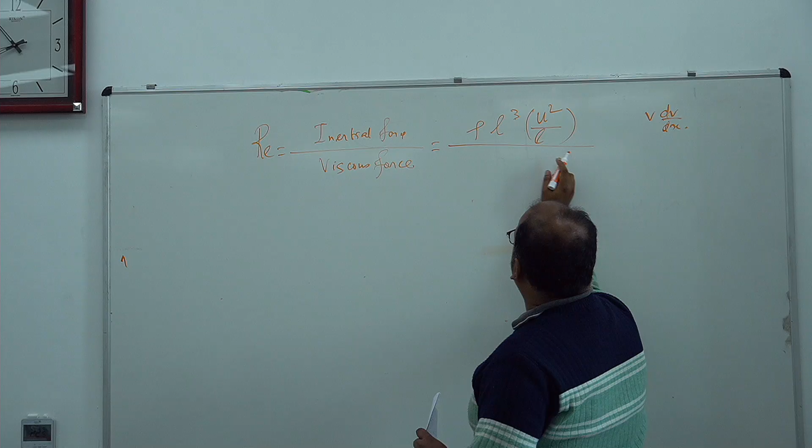Let's define the inertial force as rho L cube times the acceleration, the convective term. We can also write v dv/dx, but we can convert that to terms of L by u. So v dv/dx becomes u square by L. Or if we write v by t, we say u by t, which again eventually becomes u square by L.

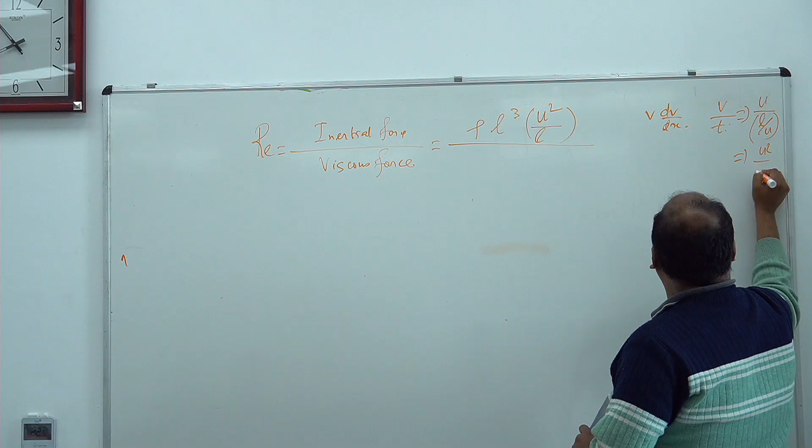Then for viscous force, take the viscosity, the area is L square, and del u del y we can take as u by L. So it becomes rho L square u square for inertial, and mu into u L for viscous. Eventually we achieve the final form we are usually accustomed to.

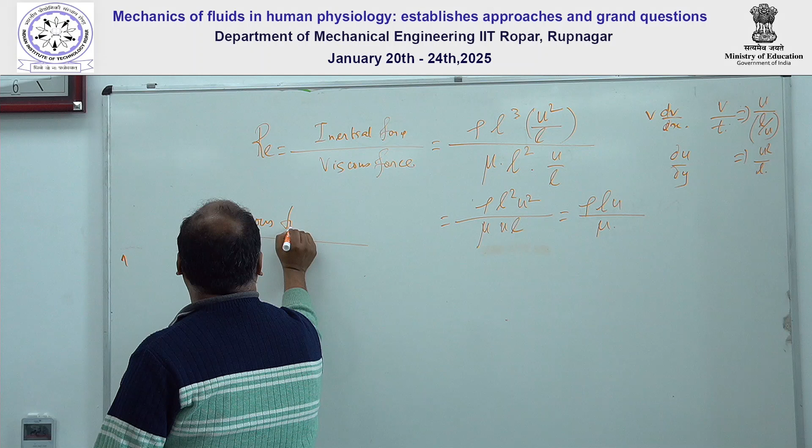This can also be interpreted as the viscous time scale by the inertial time scale. From this definition we can say that when Reynolds number is high, inertial force is much more dominant compared to the viscous force. In this definition, first let's define the viscous time scale as L square by nu.

You can see it is dimensionally consistent. This is meter square in the SI system, and nu is meter square per second, so L square by nu gives a unit of seconds. The inertial time scale, we can say simply as L by u. So we can rearrange it as u L by nu.

So we can say that when Reynolds number is very high, the viscous time scale is much higher compared to the inertial time scale. So this can be interpreted in terms of force, or it can be interpreted in terms of the two time scales.

Since I am also teaching convective heat transfer, there is a non-dimensional quantity called the Peclet number, which we generally say is the diffusive time scale by the inertial time scale. For thermal diffusion we write L square by alpha, where alpha is the thermal diffusivity, and inertial time scale is typically L by u. So this eventually becomes UL by alpha.

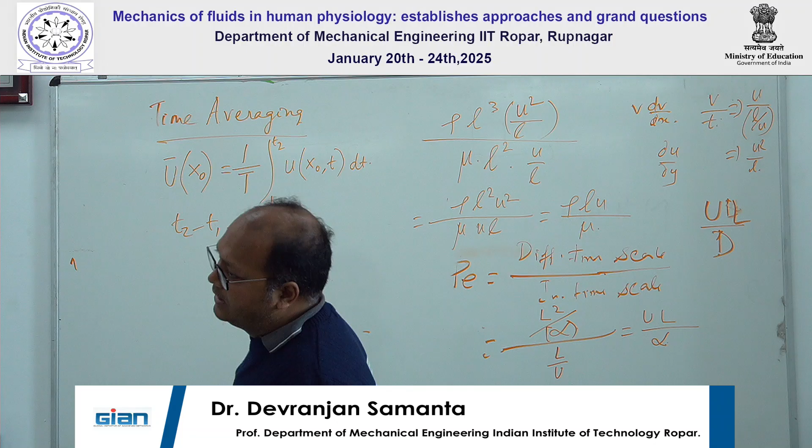In this context, just a funny story - in the IIT Ropar faculty interview, someone asked what I meant by the time averaging of this quantity. So I simply wrote from 0 to capital T, 1 by T, of U(x0,t) dt. One professor was not happy with the definition - he didn't like the idea of assigning the lower integration limit to 0. He said let's not keep it 0, rather write T1 and T2. So it's a matter of definition.

If we write from T1 to T2, just remember that the difference of the two times is the capital T. Otherwise we can start from 0, write capital T here, and then divide by capital T.

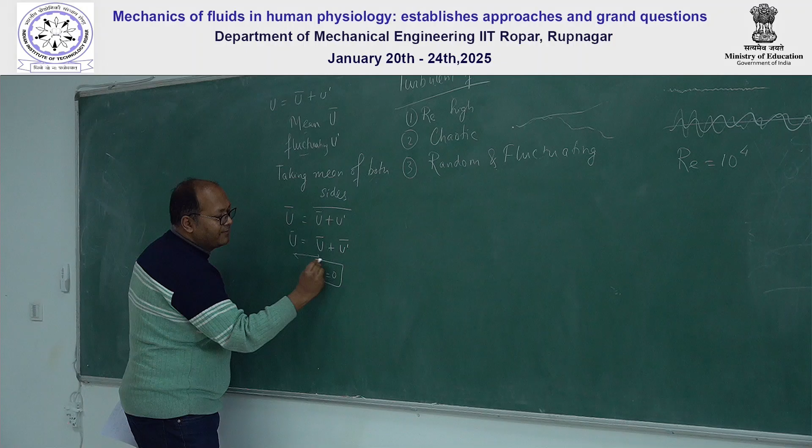So you can see that u equals u bar plus u dash. If we take the mean of both quantities on both sides - let's say this over-bar represents taking mean - so u bar plus u dash, we write like this. This quantity is already mean, so taking the mean of a constant quantity gives the same term, so u bar plus u dash bar. Now these two terms are equal to each other, so essentially, by definition, the mean of the fluctuating quantity is 0.

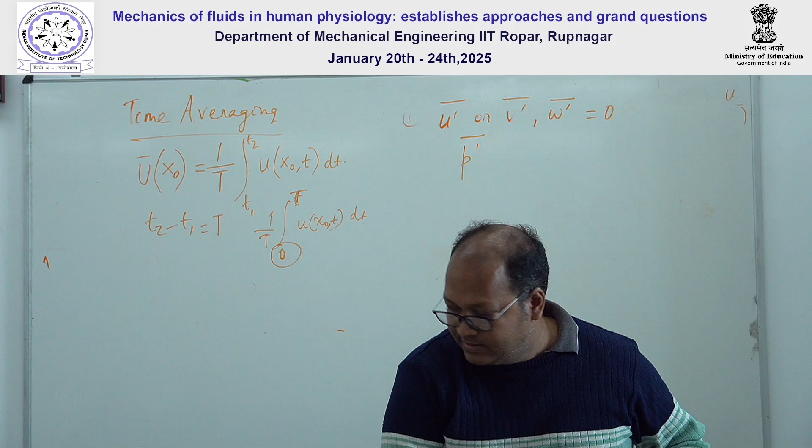This property will always be used while we derive the RANS equations. So let me write this part: any fluctuating quantity, let's say u dash, p dash, or w dash - for example the fluctuating pressure component - by definition, the mean of these fluctuating components is 0.

Then, just like time averaging, there are two other types of averaging, called space averaging and ensemble averaging, or some people pronounce it in the French way - ensemble or something like that.

Space averaging is basically, let's say, at a single time we are measuring over a 2D or 3D field at a single instant. At a given time instant t1, and the area or volume - for the sake of generality, we divide by the total volume - then over the whole field, we can write the three coordinates at a single time instant, integrated over dx dy dz.

So basically, for the sake of simplicity, let's take a 2D planar field. We measure at 10 different locations at a single time instant, then take the average of these 10 points, and say that this is the space average quantity. So that space average basically gives an idea of whether the velocity is homogeneous, or what is the degree of variation in the whole flow field. That's space average.

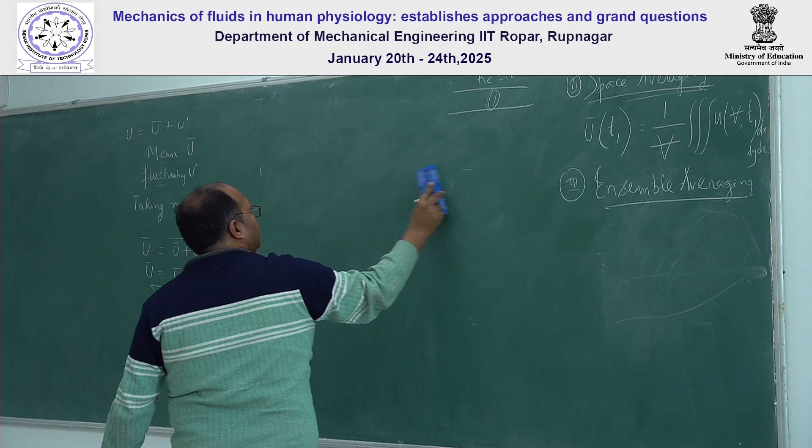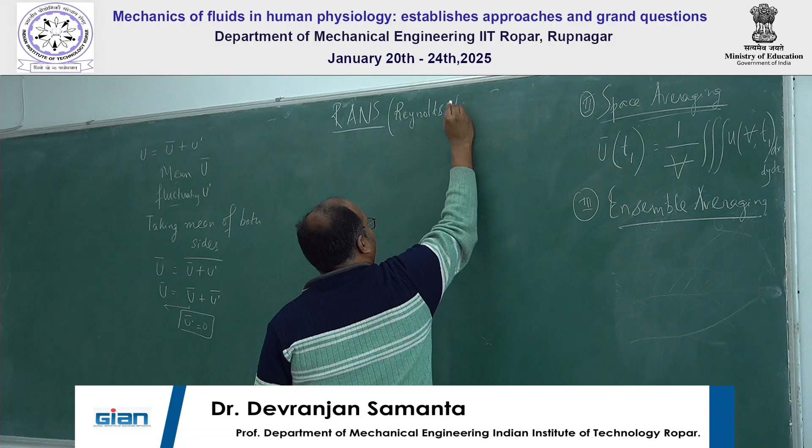RANS is Reynolds Averaged Navier-Stokes equation. I am just writing down the first two, since the Navier-Stokes part is obvious. So, Reynolds averaged.

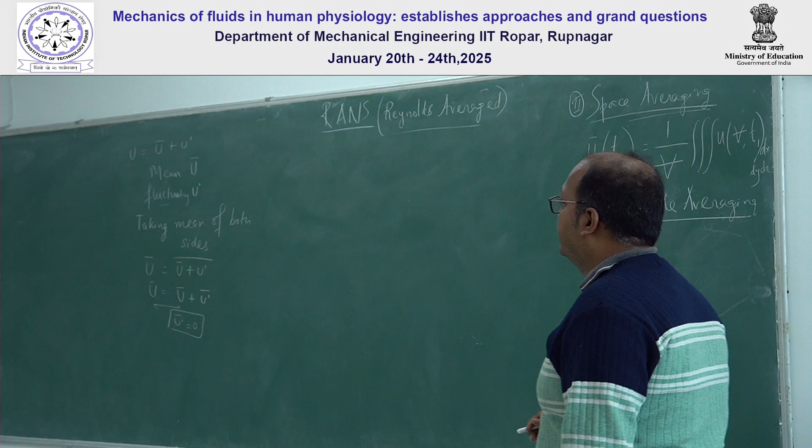So here's one thing: there is a term called stationary turbulence. By stationary turbulence, we mean, let's say we take this mean component - when it is stationary turbulence, the mean quantity is not changing over time.

So let's say some signal looks like this - if we plot U versus T and take the mean of this quantity, the mean is not changing. But let's say in some sort of pulsatory flow, the mean component is changing, and the velocity signal is fluctuating about this changing mean. So when calculating U versus T and plotting, if we plot the mean quantity, this curved line represents the mean component, and in this case the mean component is changing.

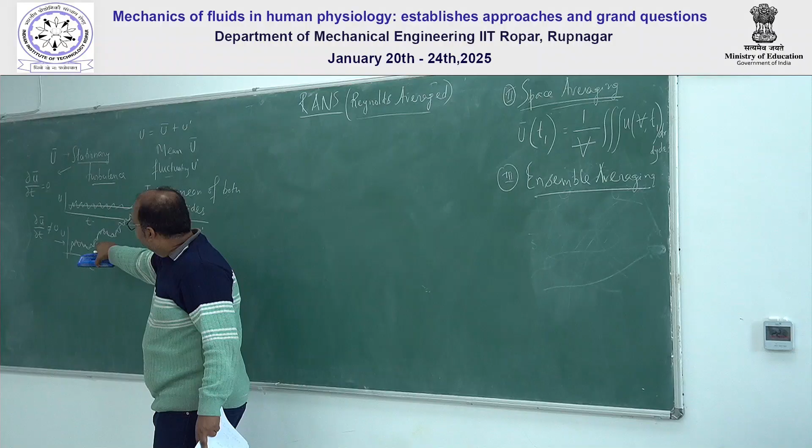So for stationary turbulence, when writing the time derivative term, if we assume stationary turbulence, we can take this as 0. But for a non-stationary case, since the mean quantity is changing, this is not equal to 0. So these are the two definitions which will be adopted: if we assume the turbulence is stationary, we can neglect that term. Otherwise, for non-stationary turbulence where the mean component is also fluctuating, we have to consider the time derivative term.

So we said initially that any quantity can be written as U bar plus U dash, and the same goes for other quantities. Let's start with the continuity equation - here again we are using incompressible flow, so for incompressible flow we can simply take the divergence of the velocity field equal to 0.

Following that, if we write it in index notation: del u_i, del x_i, or del u_j, del x_j equal to 0. Let's write it out first as del u, del x - we'll just use two components, but keep in mind that in general there are three - del u del x plus del v del y equal to 0.

Now let's assume turbulent flow. Essentially you can write this as del del x (u bar plus u dash) plus del del y (v bar plus v dash) equal to 0. If we carry out the averaging procedure here, the next step becomes del del x u bar plus del del y v bar equal to 0.

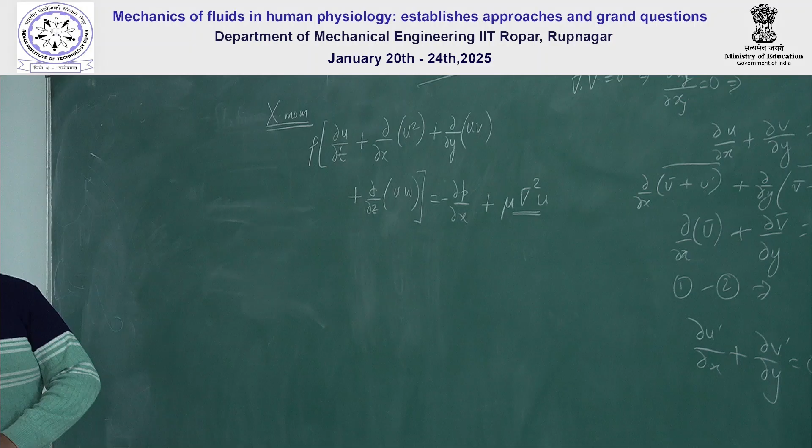Then we can write equal to minus del p del x, and we already know that mu of Laplacian square u, but we will write this term now in terms of the shear stress. So let's recalculate the stress tensor.

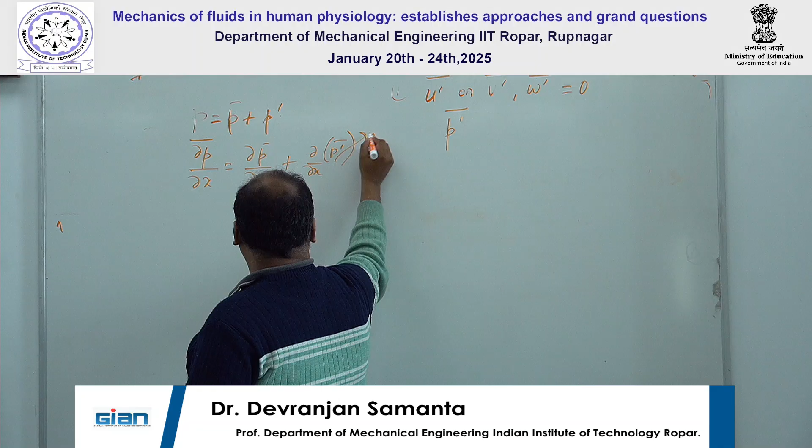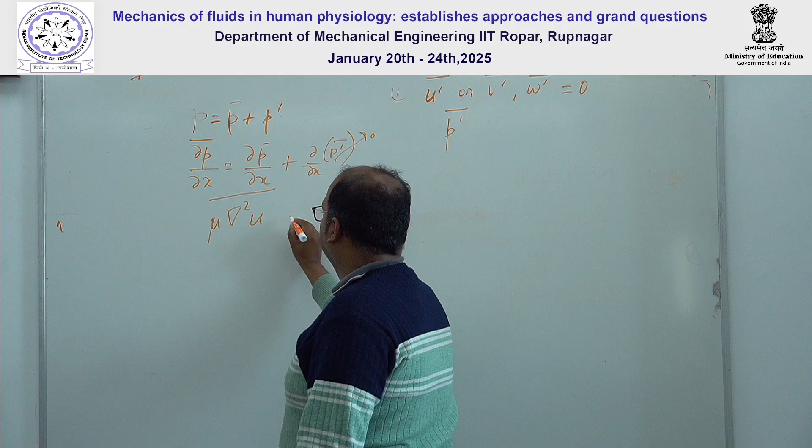Similarly, here the viscous terms mu grad square u, if we carry out the averaging procedure, this becomes mu grad square U bar only. The fluctuating component dies out.

So the stress components again, when we carry out the averaging procedure, we simply write tau xx bar. This means, let's say tau xx, if we write the general term, here p is already explicitly written.

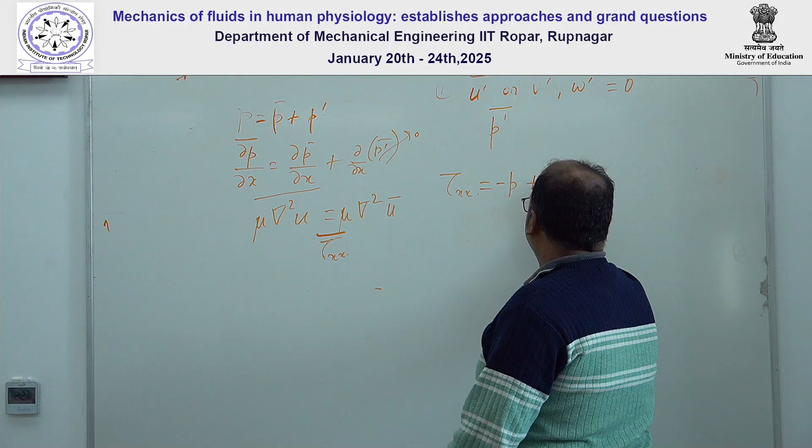So minus p plus let's say 2 mu del u del x. Okay, so for the time being, since we have already exclusively written the p term, if we carry out the averaging procedure, this becomes 2 mu del u bar del x.

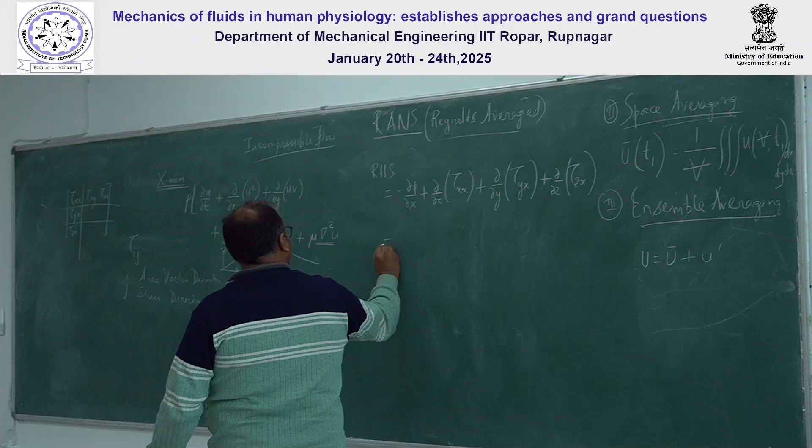Okay, so then when we are carrying out the right hand side term averaging, here we are writing equal to minus del p bar del x plus del x.

So this now just involves the derivative terms involving the mean velocity component, plus del y tau yx bar plus del z tau zx bar.

So just like if you recall here, you can write down the index term and you can also expand it. So let's say tau ij equal to minus p delta ij plus 2 mu Sij, which is the velocity gradient term. Please note I haven't written the lambda term because we are assuming it is incompressible. So Sij is half del ui del xj plus del uj del xi.

So when we are writing the tau xy term, the Kronecker delta will cancel out. So you can write 2 mu half of, let's say x is 1 and y is 2, del u by del y plus del v by del x. So this becomes mu del u del y plus del v del x.

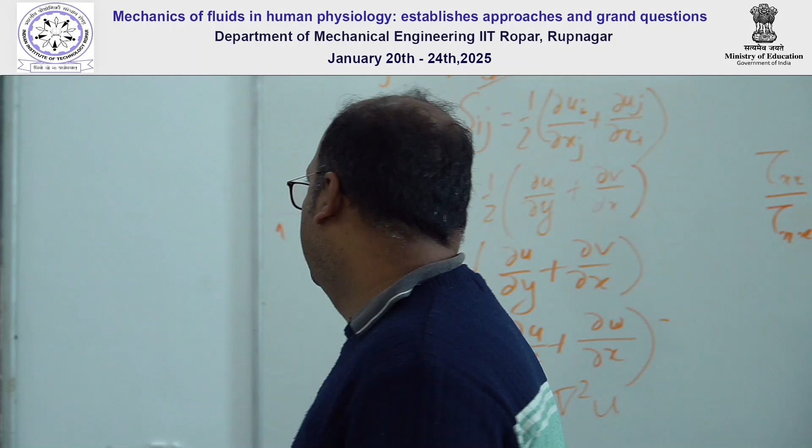Similarly, in the y direction momentum equation, we will land up with the Laplacian mu grad square v, and mu grad square w.

So let me just write down the y momentum equation. We know there will be mu grad square v and mu grad square w, but this essentially comes from these sort of derivatives. Let me just write it out.

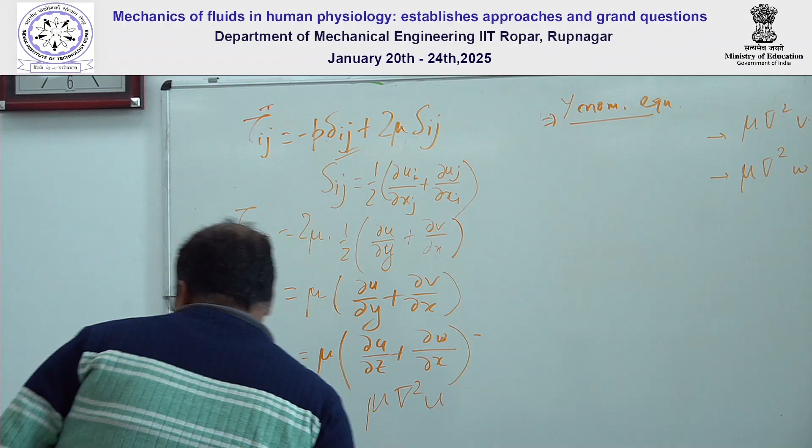First, here you can see tau xy, tau yy, and tau zy. So in the y direction it will be del del x tau xy plus del del y tau yy plus del del z tau zy.

So here also you can see that if you note the second index, all are y, but the first index, the area vectors are acting in different directions, that is x, y and z.

Similarly, in the z axis you can see the component, the second index will always be the same: tau xz, tau yz, and tau zz. So if we follow this pattern, we can write this varying along x, this varying along y, and this varying along z.

So again, the right hand side stress components for the z direction, the simplified term we have already written as mu Laplacian of w, but when we write it out it will be del del x of tau xz plus del del y of tau yz plus del del z of tau zz.

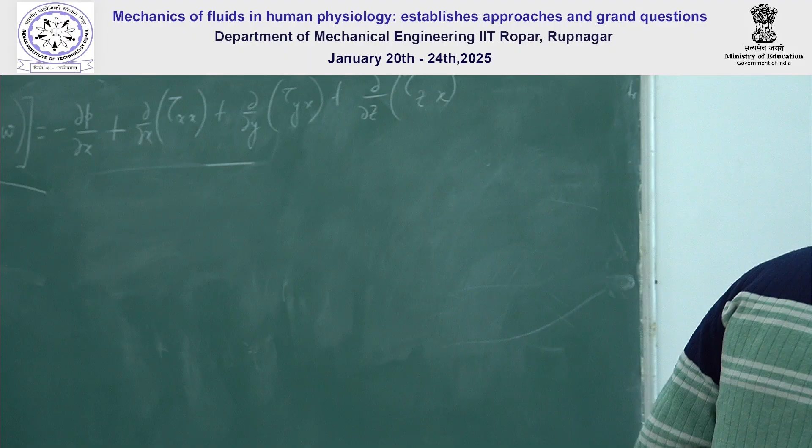So let's write down the left hand side average quantities here. So this term will give these two terms: one is the square of the mean component, and one is the mean of the squared fluctuating component.

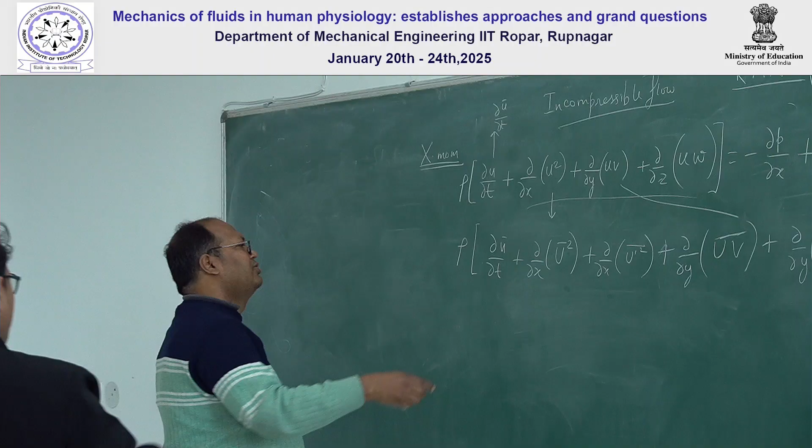So let's, for the sake of it, we make it stationary turbulence. Okay, let's remove it. So here, we are assuming stationary turbulence, that's why we are dropping the term, and then we are just left with the three terms, and these three terms, after averaging, are generating the six terms. So what we are seeing now is that normally these components are taken in this part, and they are said to be Reynolds stress terms. But actually, if you see the derivation, these terms are arising.

So essentially, how are these terms coming? This, when we are doing the momentum equation derivation, is basically the variation of the momentum flux in the different directions, right?

So you can imagine that this is the variation of the momentum flux due to the mean component, and this is the variation of the momentum flux due to the fluctuating component. Although normally, when we don't look at the derivation part, we straight away say that these components will come into this side, and we term those as Reynolds stress. But the physical significance is, please remember, it is not stress actually, it is arising due to the whole fluctuating component. Later we will club together in terms of the stress component.

So here, after this, let's write down, we are dropping the stationary term. On this side, if we write the derivative term, we can also drop it depending upon the choice. I will just keep it because later I want to show that it can be clubbed together. So let's say we are writing like this: del x u bar square plus del y u bar v bar plus del z u bar w bar.

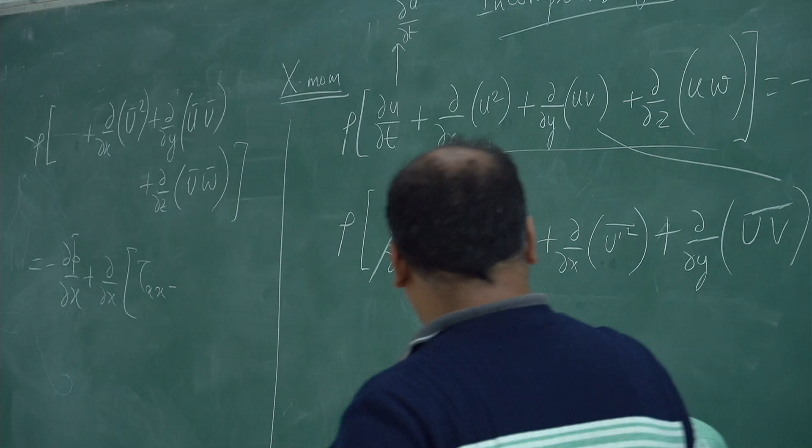Okay, so here you can see that these are the fluctuating components. This again, this is one, and this is one. So these will go on the other side.

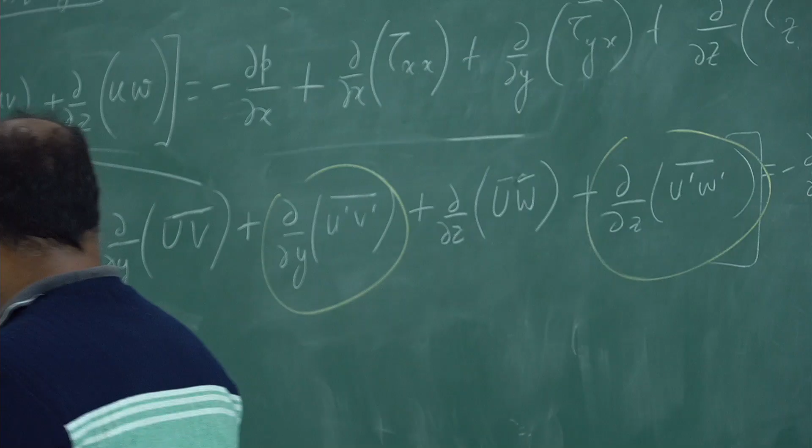Now we are writing like this: minus rho u dash square plus del y tau yx minus rho u dash v dash plus del z tau zx minus rho u dash w dash.

Okay, so now you can see after the averaging procedure, we are taking the fluctuating components to this side and we are clubbing it with this one. Please see, this is again over bar.

So the tau bar xx essentially means 2 mu del u bar del x. Tau yx means mu times del u bar del y plus del v bar del x. So even if I forget to write the overbar symbol, please assume that this is the averaged quantity.

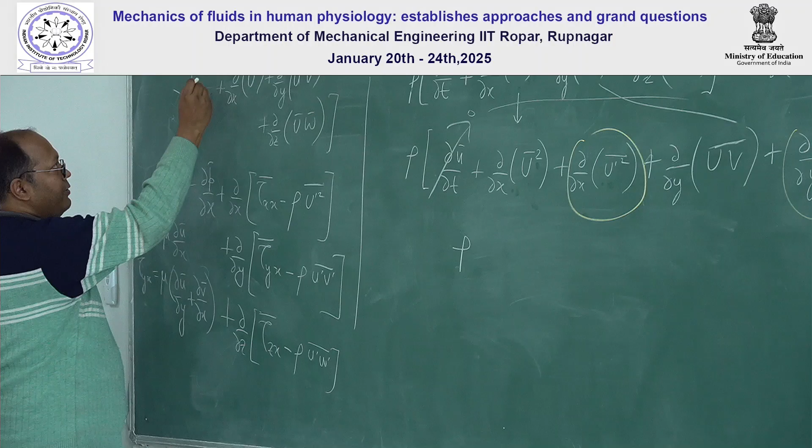Okay, so how much time? I guess I have still some 15 minutes. So now you can see that this one and eventually these four terms, let's just write T here.

So this can be further simplified as D u bar D t. The left hand side terms, if you carry out the averaging procedure and follow the information using the flow conditions, you can finally write the left hand side like this. The pressure components will always be minus del P bar del X, minus del P bar del Y, minus del P bar del Z.

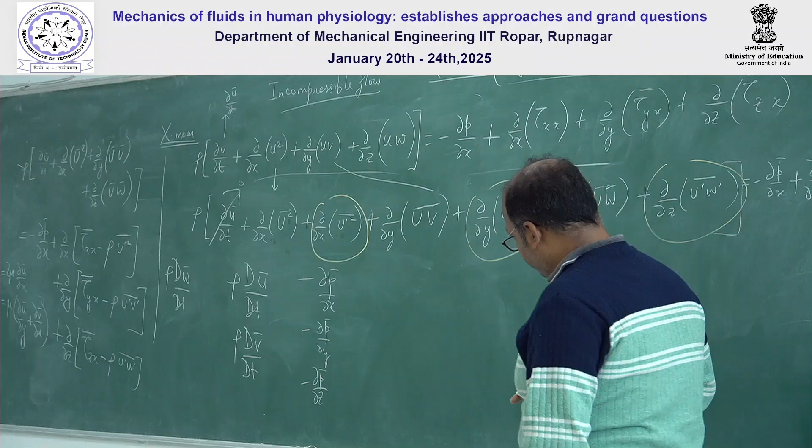If we consider the body force, we are saying that the body force is not fluctuating. So for the sake of convenience, we are just dropping those terms. Even if there is any body force term, that will not have any mean or fluctuating component. The gravitational force will always be as it is, or electromagnetic force will never fluctuate. And even if it fluctuates, like Coulomb force doing some electromagnetic interaction, that is not like this typical turbulent fluctuating quantity. So this one is essentially the left hand side, this is the pressure gradient term.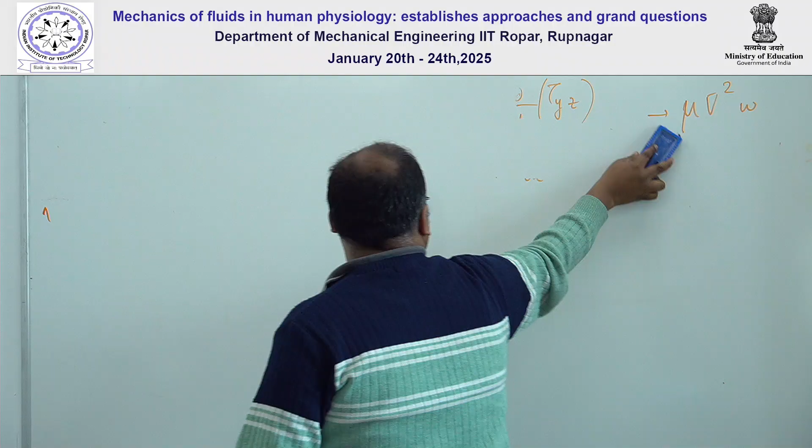If we now look at the stress components, let's just write down the stress component here. We just derived the left hand side, sorry, the x momentum equation.

The stress component will be tau xx minus rho u dash square plus del y tau yx bar minus rho u dash v dash plus del z tau zx minus rho u dash w dash. So now you can see here there is u dash square, u dash v dash and u dash w dash. If we club all the three directions together, let's first write this down. So this is the x momentum.

If we do the averaging procedure of the y momentum, we have earlier written down the stress components. So here again, just remember that the y direction components are tau xy, tau yy and tau zy. It is varying along x, it is varying along y and it is varying along z. So when we carry out the averaging procedure here, we are writing del x tau xy minus here now it will be... or let me just write down the Reynolds stress in matrix form first, that will be easier.

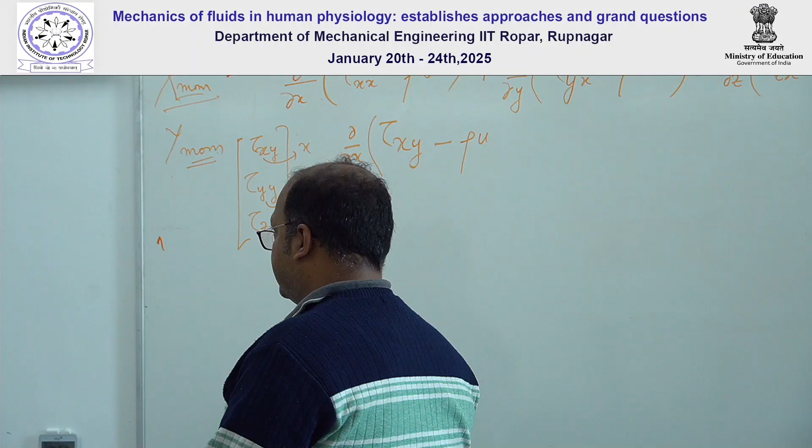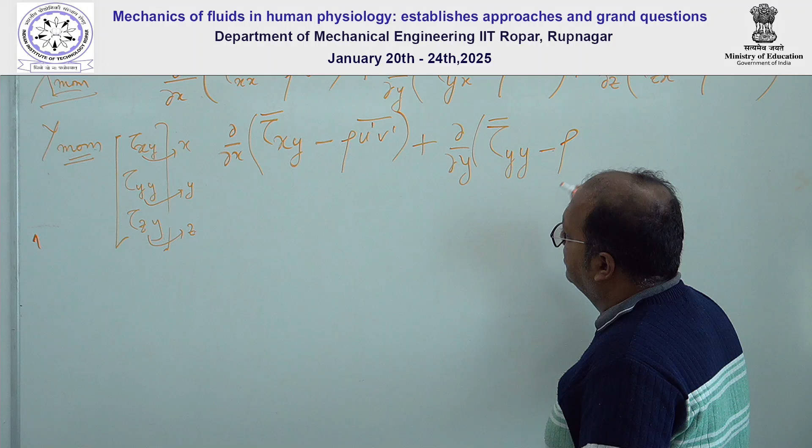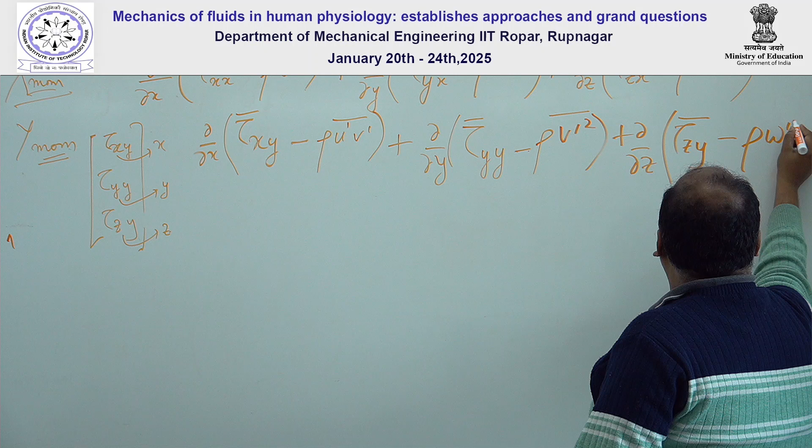So if you follow the Reynolds stress matrix, the second component, you can write here U dash V dash, then del y, bar again. We know this will be yy minus the rho. Which component should come, right? V dash square. So here rho V dash square term is coming, plus del z, tau zy bar minus rho w dash v dash.

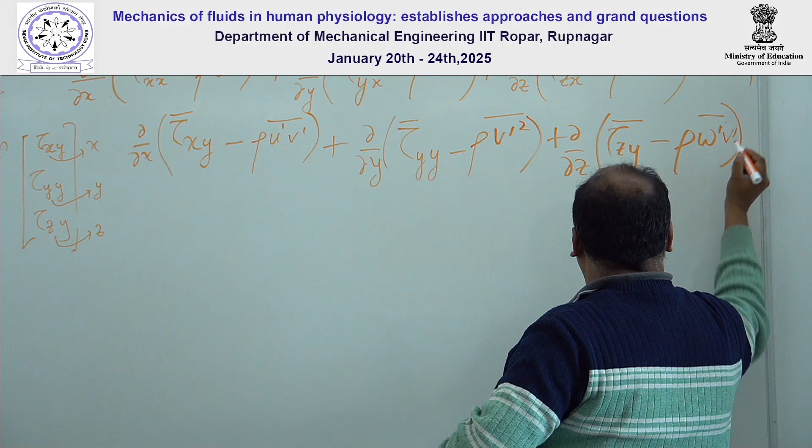Now follow this logic and try to derive the z momentum equation, tell me, or one of you can come and write it down. So this should be rho w dash v dash, right? So maybe it's okay, right? Yeah.

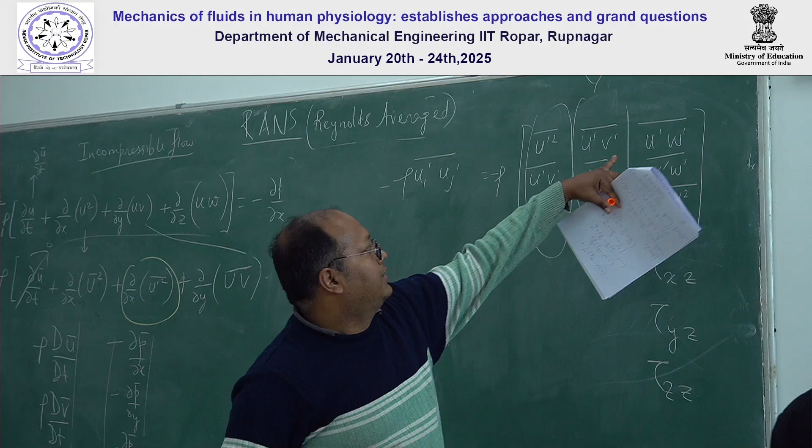So no, for the z momentum. z momentum involves, let me just write down the stress components for you: this will be tau xz, tau yz, and tau zz. These are the Reynolds stress components in the z direction. So Shasikant will try to just write down the stress components in the z direction following this one: U dash W dash.

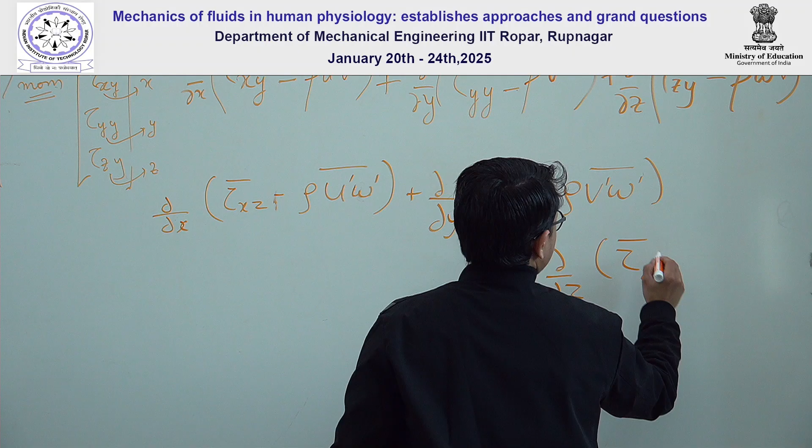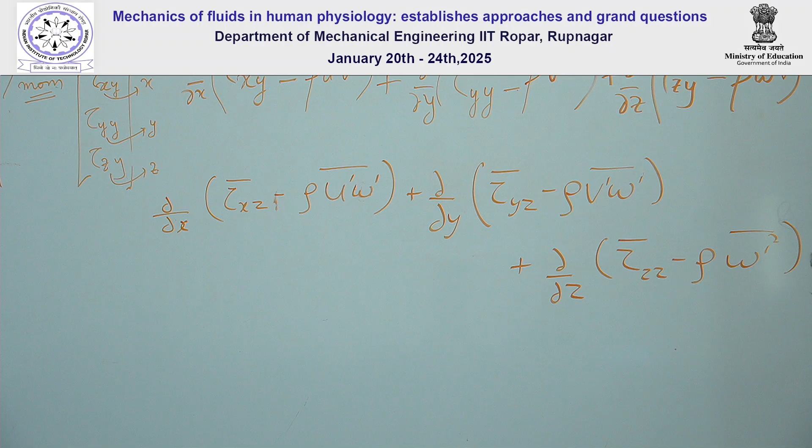Okay, so this is correct, right? What is written here, so you get the logic. Initially, instead of writing mu Laplacian of u, we have written the direct stress component so that we can club these quantities together with the x terms. After doing this algebraic operation, since it is clubbed with the stress component, that's why we call it Reynolds stress. Although we just said that physically it implies the momentum flux due to the fluctuating components, so please keep in mind the physical significance.

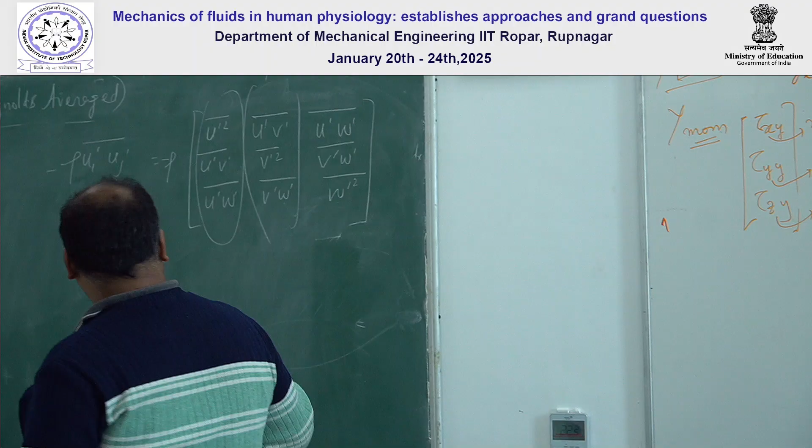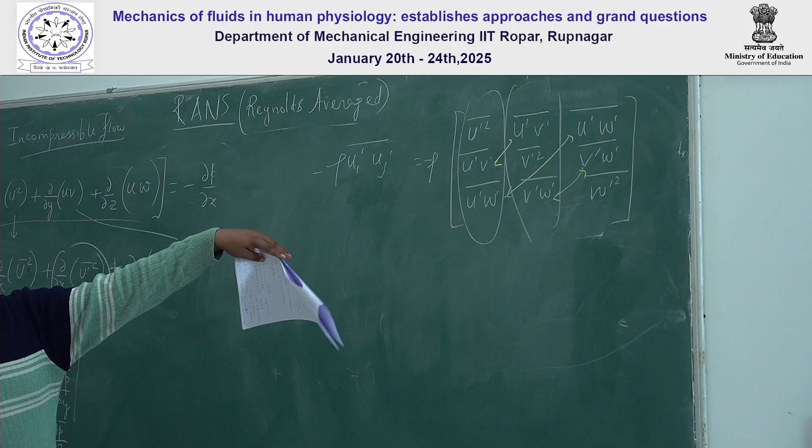Okay, so now if you look here, this is the matrix. You can see that these two are equivalent, these two are equivalent, these two are equivalent. So here it's a symmetric one, right? So this is symmetric, and 6 unique or individual components have come.

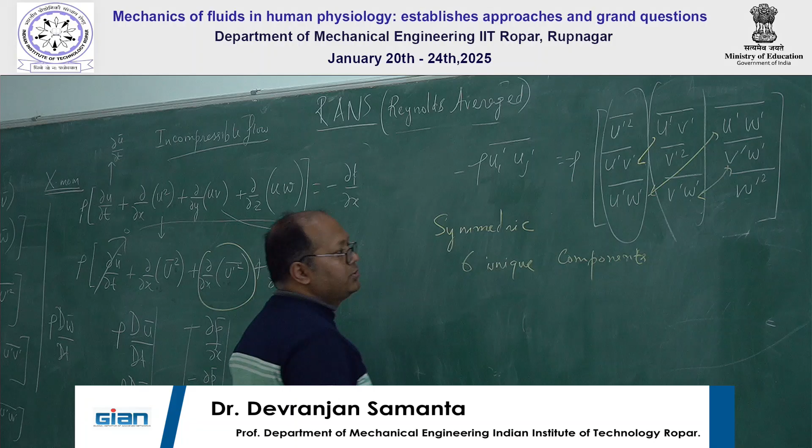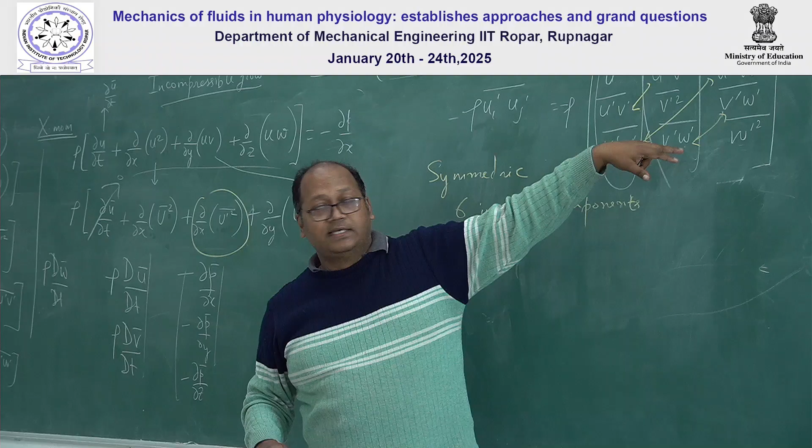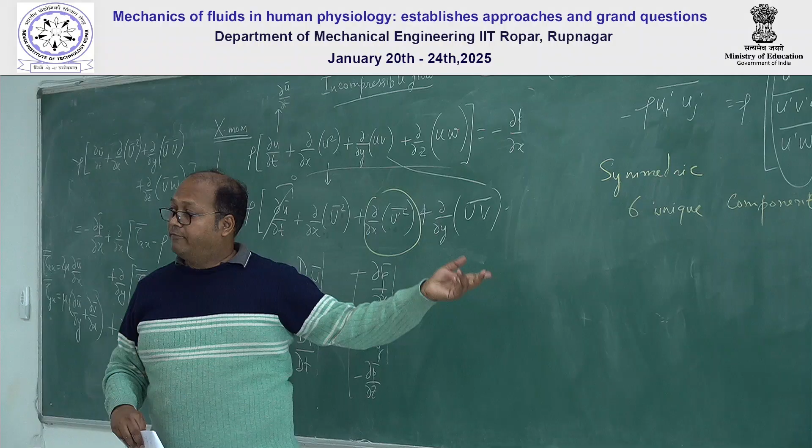Earlier, for a simple laminar case, we are using the 3 momentum equations and the continuity equation. So u, v, w and p, these are the unknown terms, we can find out from 4 different equations, 4 different variables. Here we are using 4 different equations, the continuity equation and the 3 average momentum equations, but then we have no clue about these 6 individual components. The averaging procedure is generating 6 unique components, so the number of variables is more than the governing equations.

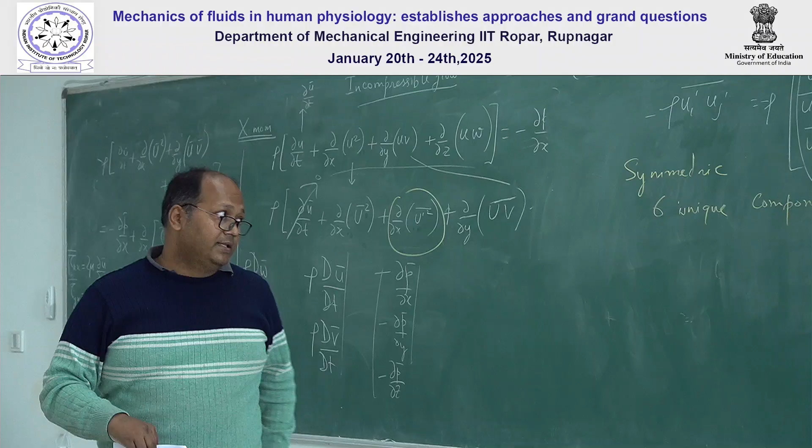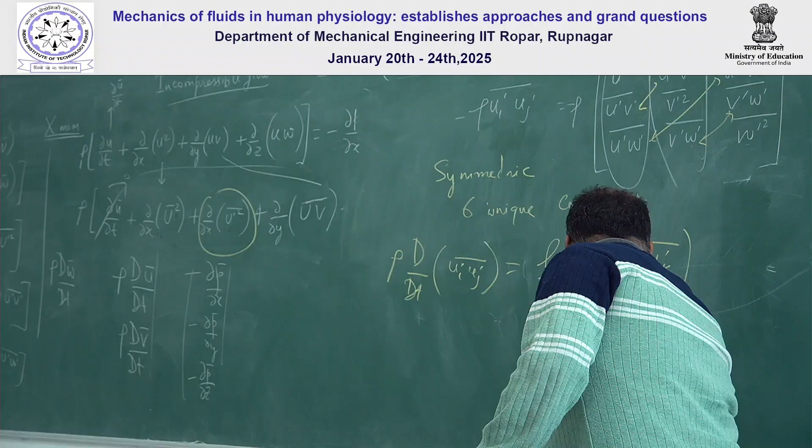Since we do not know anything about these average quantities, if we further carry out the averaging procedure, in the next step you will see some equation like rho ddt of ui uj dash average quantity, this will generate an equation involving ui uj uk dash, the triple product of three fluctuating components. This again generates more equations. If we further carry this out, it will involve an equation generating ui dash, uj dash, uk dash, and ul dash. So it's a never-ending problem, right? This problem in turbulence is called the turbulence closure problem.

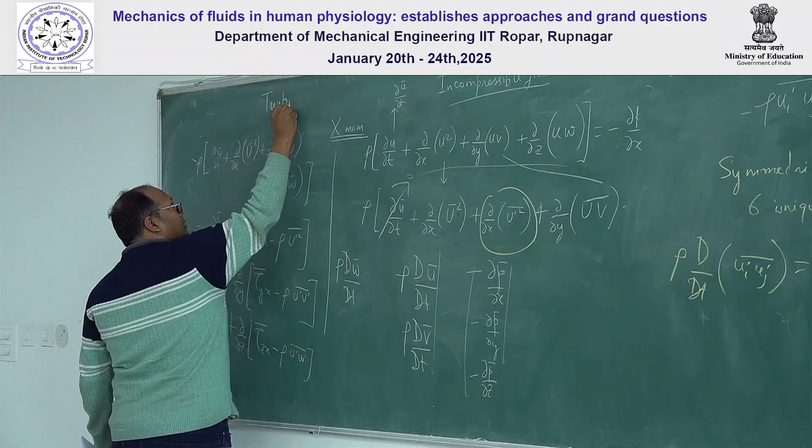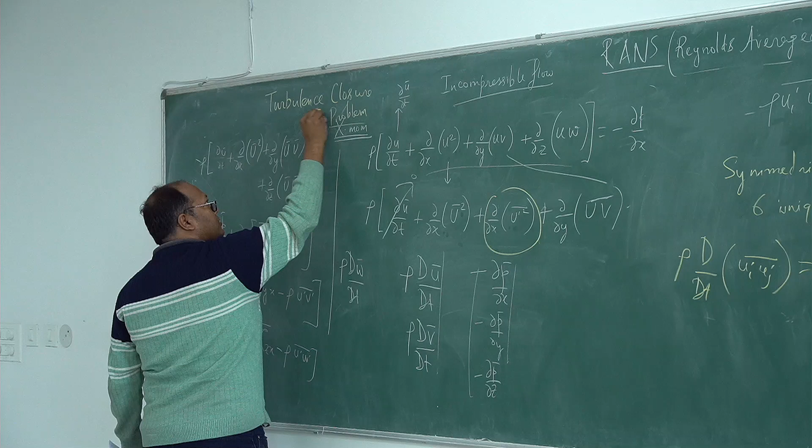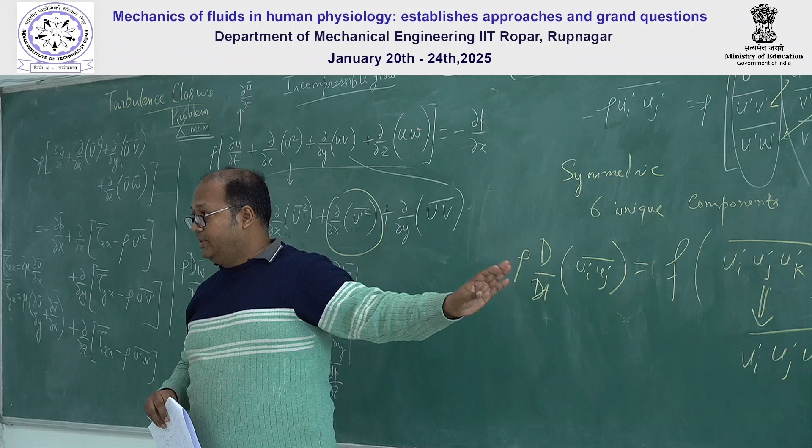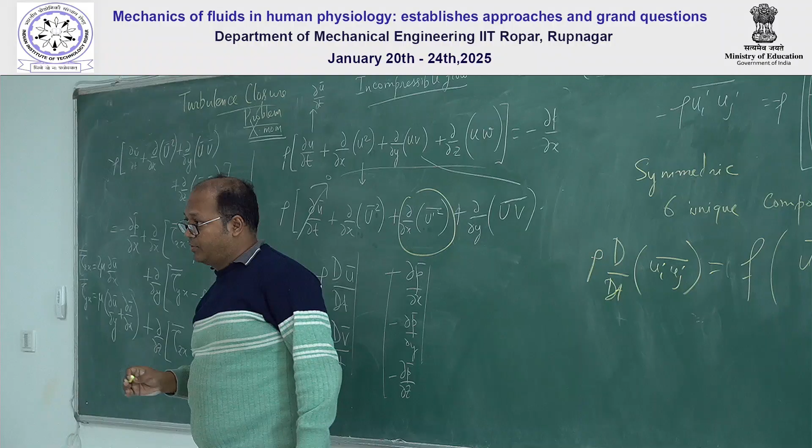So that is why we do some approximations. There is not too much time, I just want to stop here, and we'll continue this part in the next class. We'll discuss the schedule later, and that's all for now. We carried out the averaging procedure, and showed that these are actually not stress components. Due to the averaging procedure, analytically if we try to solve, this will not make our life easier, and since the number of variables will always be more than the number of governing equations, we say it is a turbulence closure problem. Later, how to deal with the turbulence closure problem, we'll discuss in the next session.